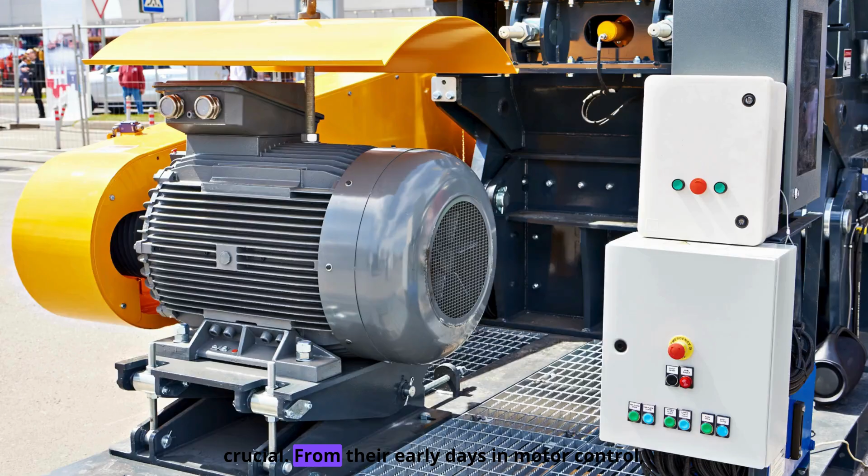Welcome back. Today, we're diving into the world of Allen-Bradley PLCs, a dominant force in industrial automation, brought to you by Rockwell Automation. Whether you're new to the field or need a refresher, understanding their controller families and software is crucial. From their early days in motor control, Allen-Bradley became pioneers in programmable logic controllers, even coining the term PLC.

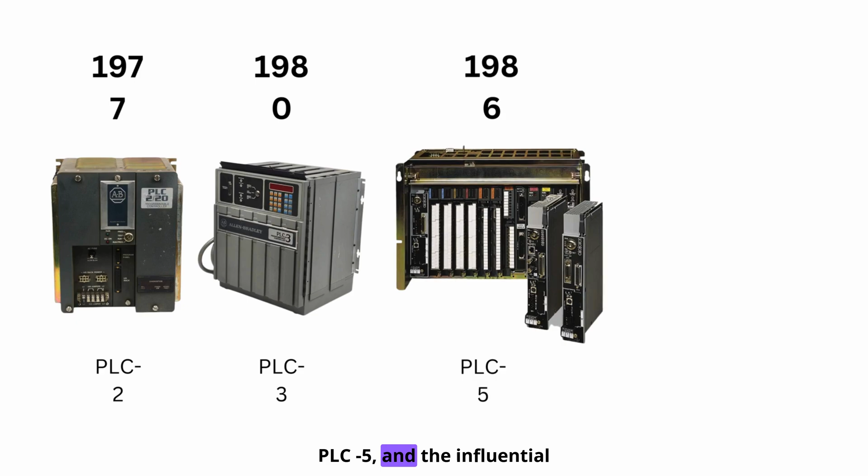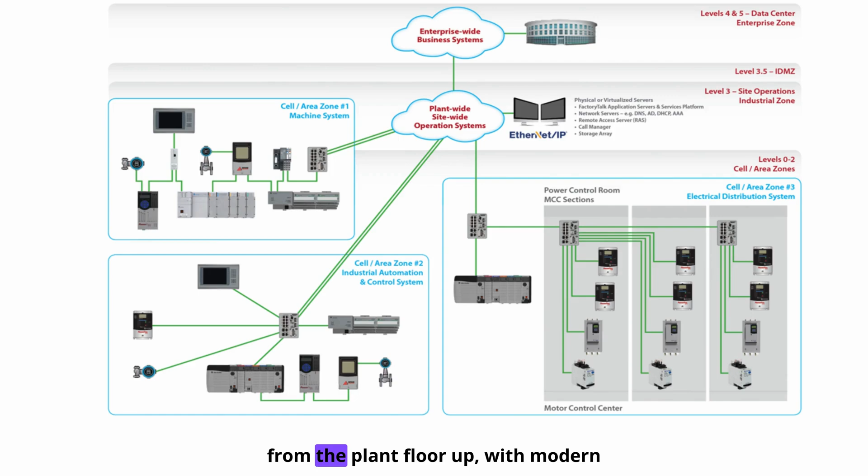They didn't invent the first one, but their early models like the PLC-2, PLC-5, and the influential SLC-500 cemented their legacy. Now, Rockwell Automation is a global leader, especially strong in North America. Their connected enterprise vision drives integration from the plant floor up, with modern controllers acting as key hubs.

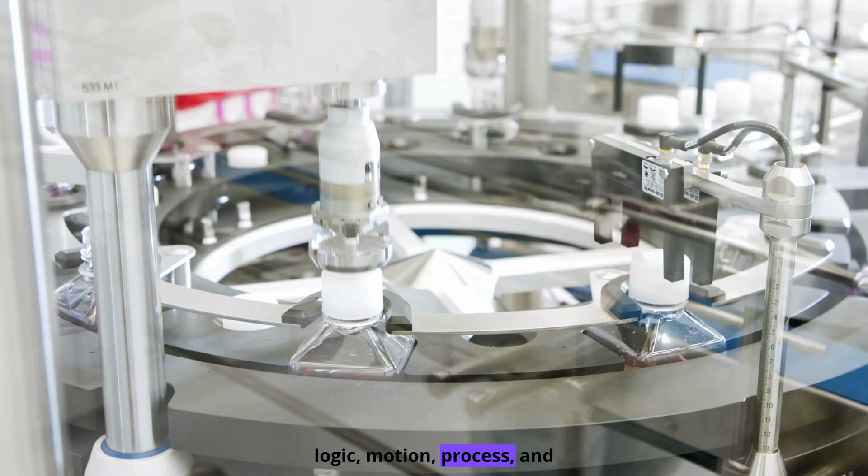You'll often hear PLC and PAC, Programmable Automation Controller. Modern Allen-Bradley units like ControlLogix are PACs, handling logic, motion, process, and safety in one platform. Rockwell offers controllers for every scale. Let's look at the main families relevant today, bridging legacy and modern systems.

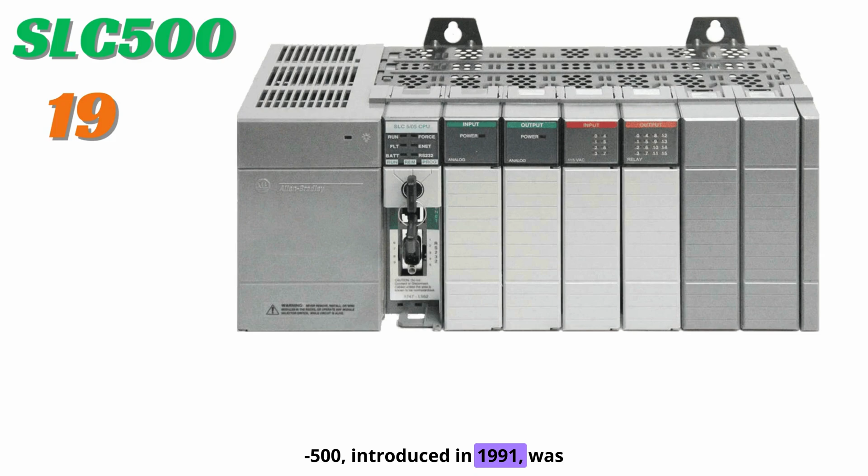First, the legacy systems, often programmed with RSLogix 500. The SLC 500, introduced in '91, was a modular, affordable step-up from older systems. It uses file-based addressing like N7:0 or B3:0/1. While aging, the Ethernet-equipped SLC 5/05 is still found in many plants.

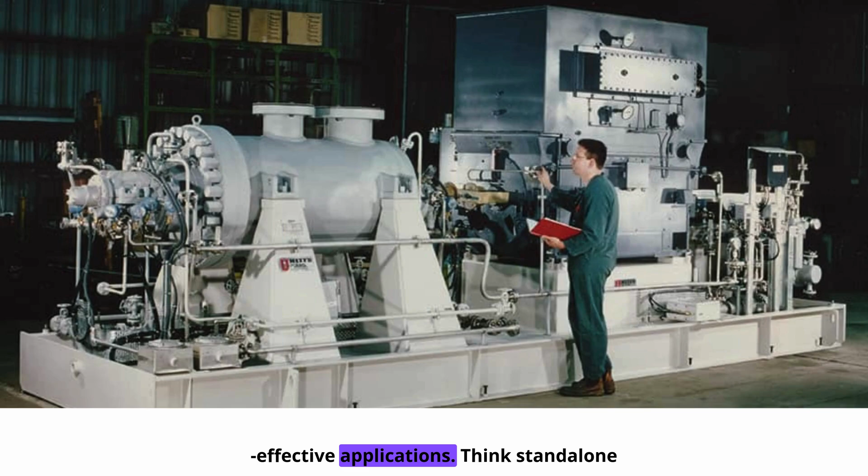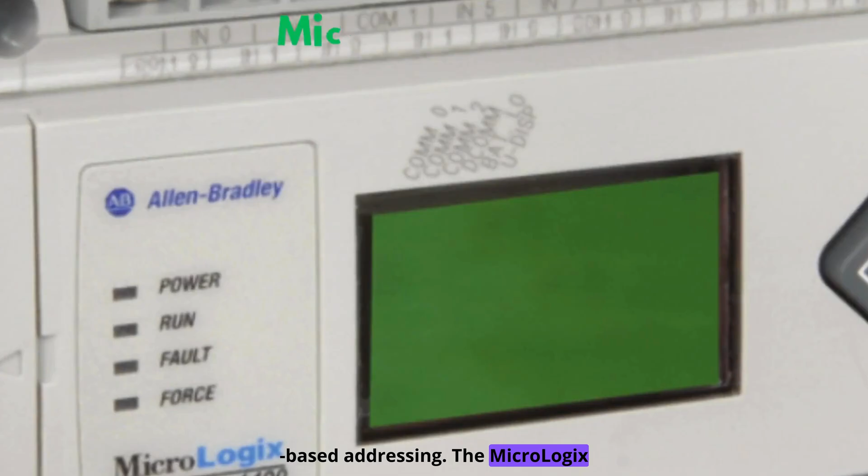The MicroLogix family, starting in '94, targeted smaller, cost-effective applications. Think standalone machines. These are typically brick-style controllers with built-in I/O, expandable to the side. They also use RSLogix 500 and file-based addressing. The MicroLogix 1400, with its built-in Ethernet, remains a popular workhorse. Remember, this is distinct from the newer Micro800 family using CCW software.

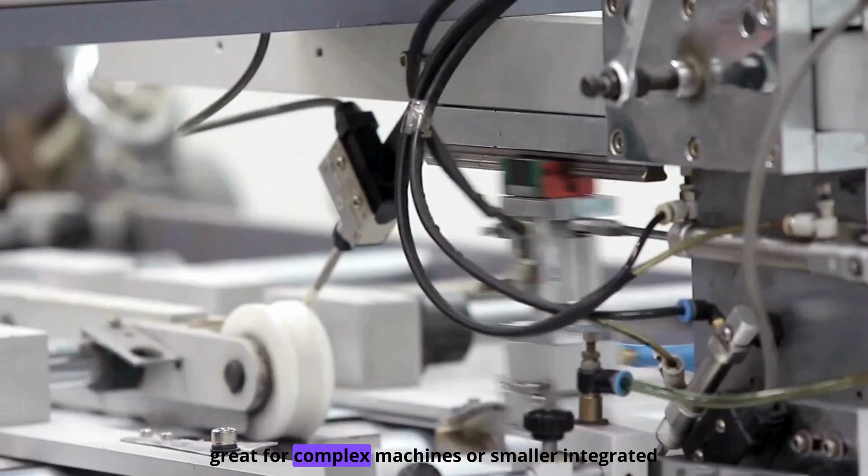Now, the modern Logix platform, programmed with Studio 5000 Logix Designer. These are PACs. The CompactLogix family bridges the gap. It's powerful, uses tag-based addressing, descriptive names like motor speed instead of cryptic addresses, and is great for complex machines or smaller integrated systems. Newer series like the 5380 offer high performance and integrated motion.

At the top sits the ControlLogix family. These are modular, chassis-based PACs for the largest, most demanding applications. Entire production lines, complex process control, high-speed motion. They offer the highest performance, scalability, redundancy options, and use Studio 5000 with tag-based addressing. Choosing between these families often comes down to hardware capabilities.

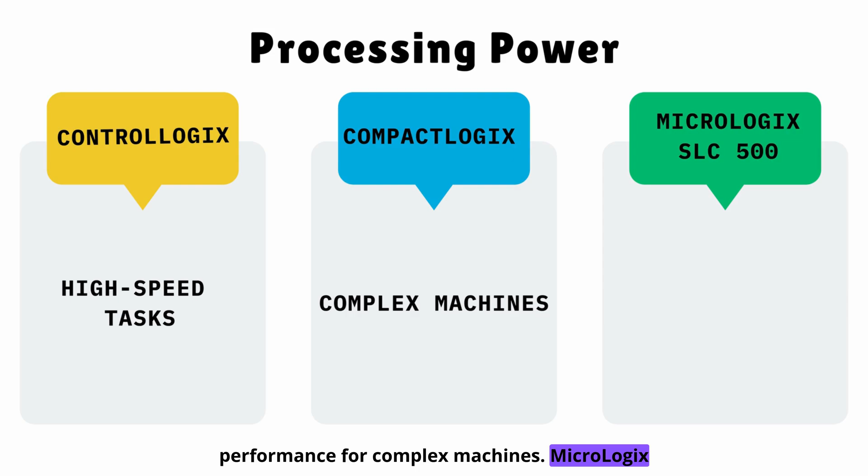Processing power. ControlLogix, especially the L8 series, is the fastest, ideal for high-speed tasks. CompactLogix 5380/5480 offers excellent performance for complex machines. MicroLogix and SLC 500 are suitable for simpler, less time-critical applications. Memory. ControlLogix has the most memory for large, complex programs. CompactLogix offers substantial memory for mid-range needs. MicroLogix and SLC have less, suited for smaller applications.

I/O and scalability. ControlLogix handles thousands of I/O points, both local and distributed, with features like online module changes. CompactLogix handles hundreds, good for machines or system areas. MicroLogix has limited local expansion. SLC 500 is moderate, supporting some remote I/O.

Size and cost. MicroLogix is the most compact and cost-effective. SLC is chassis-based, but older. CompactLogix offers modularity in a smaller footprint than ControlLogix, sitting in the mid-range cost. ControlLogix is the largest and most expensive, reflecting its premium capabilities.

Application scale. Match the controller to the job. MicroLogix for small standalone machines. SLC for legacy systems. CompactLogix for complex machines and mid-size systems. ControlLogix for large-scale, plant-wide, or critical high-performance applications. The software environment is just as important as the hardware.

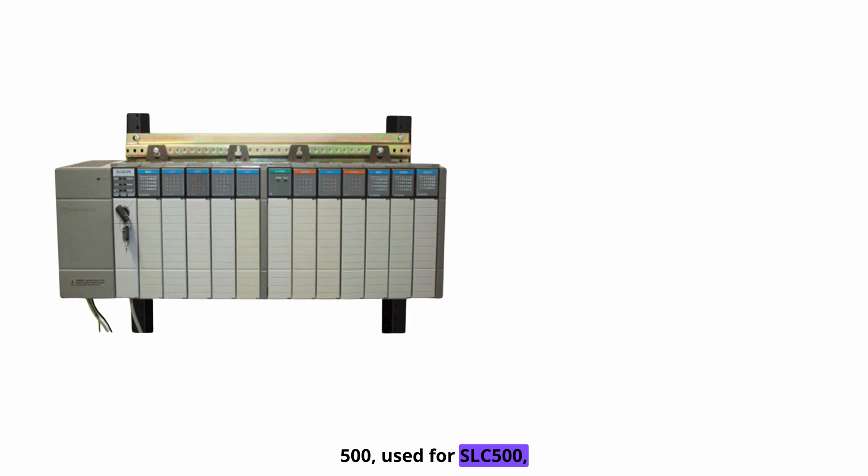There are two main suites. RSLogix 500, used for SLC 500 and MicroLogix. It features a simpler, older interface focused primarily on ladder logic. Its strength is file-based addressing, requiring you to manage memory locations like N7:0. Licensing is simpler and generally less expensive.

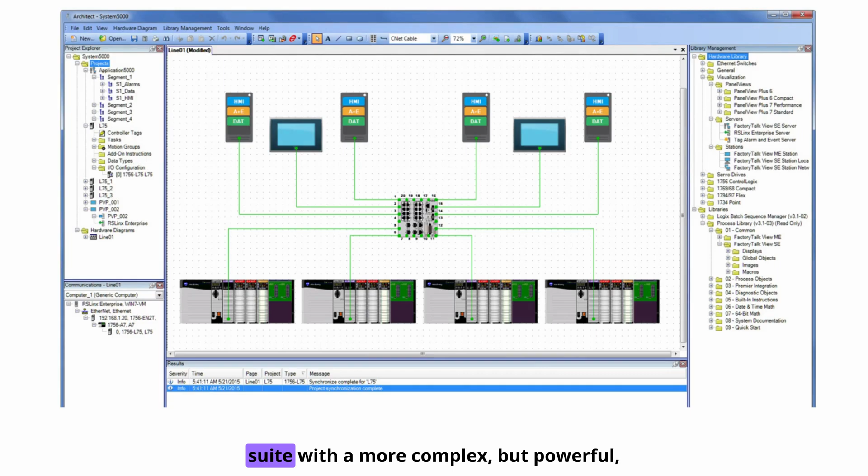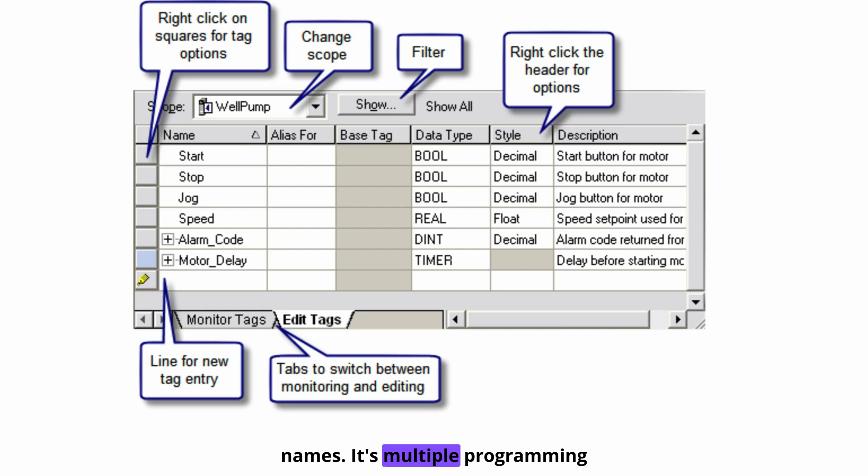Studio 5000 Logix Designer, the modern environment for CompactLogix and ControlLogix. It's an integrated suite with a more complex but powerful interface. Its biggest advantage is tag-based addressing, using meaningful names. It supports multiple programming languages: ladder diagram (LD), function block diagram (FBD), structured text (ST), and sequential function chart (SFC), letting you use the best language for the task.

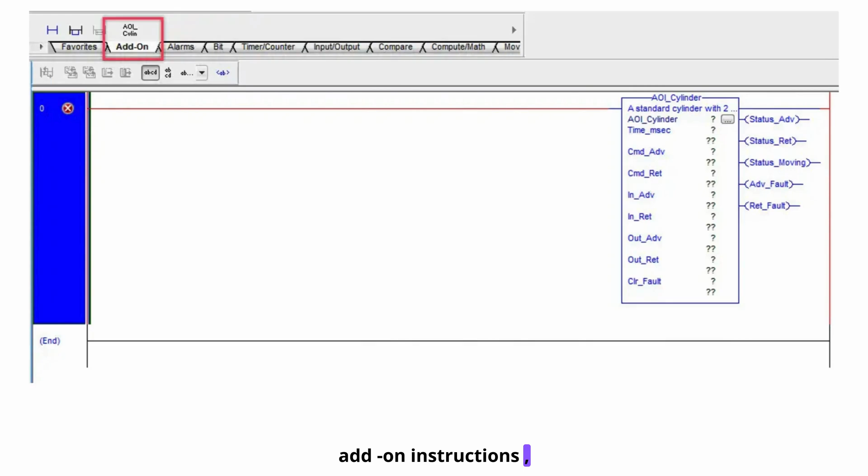Studio 5000 promotes code reuse through user-defined types (UDTs), custom data structures, and add-on instructions (AOIs), reusable code blocks. This speeds up development and standardizes code. A critical point with Studio 5000 is versioning. The software version must match the controller's firmware revision exactly. You might need multiple Studio 5000 versions installed. Licensing is tiered and more complex, with higher costs, especially for advanced features or controller support.

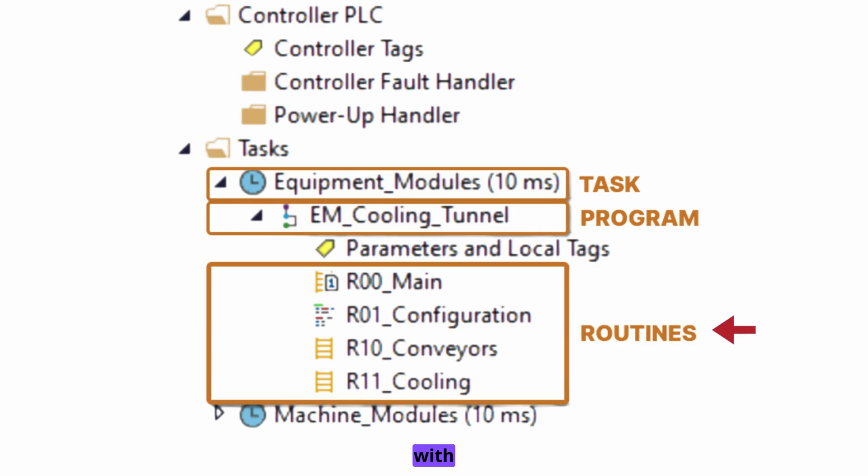Inside Studio 5000, projects are organized hierarchically. Tasks determine when code runs: continuously, periodically at fixed intervals, crucial for timing, or triggered by events. Programs organize logic within tasks. Routines contain the actual code, ladder, structured text, etc., with subroutines called as needed.

The tag database is central. You define tags with names, data types such as BOOL, DINT, REAL, and scope, controller-wide or program local. UDTs allow creating complex data structures, like grouping all data for a motor. AOIs let you encapsulate logic, like a standard motor starter block for easy reuse.

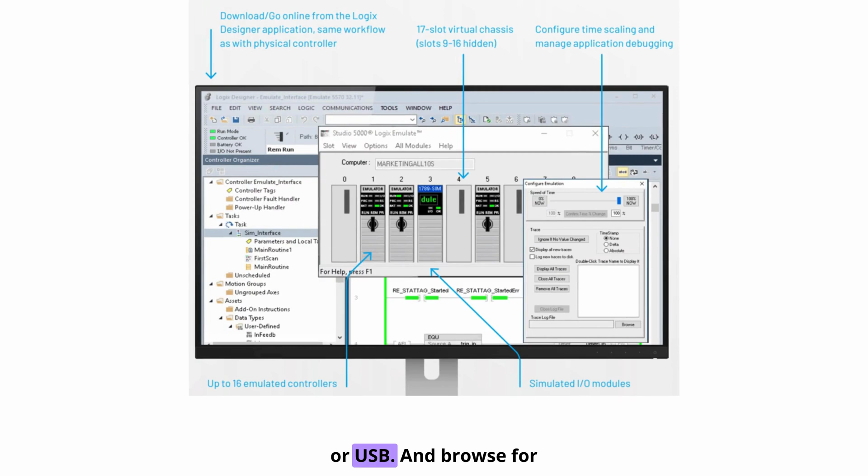Communication setup relies on RSLinx Classic, older, or FactoryTalk Linx, newer, to configure drivers like EtherNet/IP or USB, and browse for controllers to connect to for downloading, uploading, or going online to monitor logic in real time.

Firmware, the embedded software on the hardware, needs management. Updates provide bug fixes, security patches, and new features, but require careful planning due to the strict Studio 5000 version dependency. Use Rockwell's Product Compatibility and Download Center (PCDC) website to find firmware, check compatibility, and read release notes. The ControlFLASH Plus tool is used to download firmware to devices, often over EtherNet/IP or USB. It can update multiple devices and helps manage revisions.

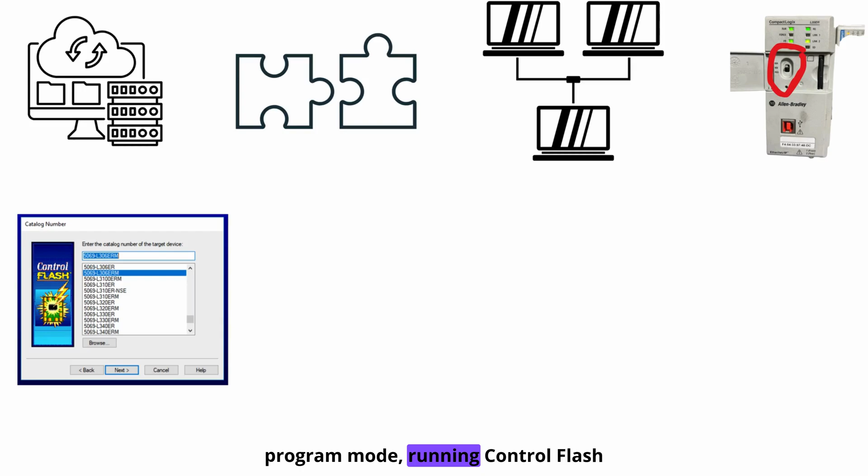The update process involves backing up your program, ensuring compatibility, establishing a stable connection, putting the PLC in program mode, running ControlFLASH Plus, and never interrupting power during the flash. Afterward, restore the program and test thoroughly.

Modern automation relies on networks. EtherNet/IP is the standard for Allen-Bradley's Logix platform. It uses standard Ethernet hardware, but applies the Common Industrial Protocol, CIP, for robust control data exchange. It supports high speeds and resilient topologies like Device Level Ring (DLR). CIP is the key. It's the common language used across EtherNet/IP, ControlNet, an older deterministic network, and DeviceNet, a sensor-actuator bus.

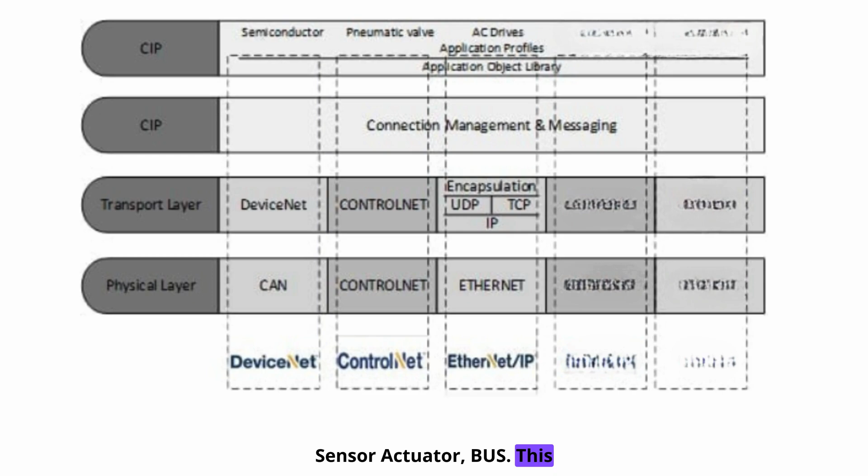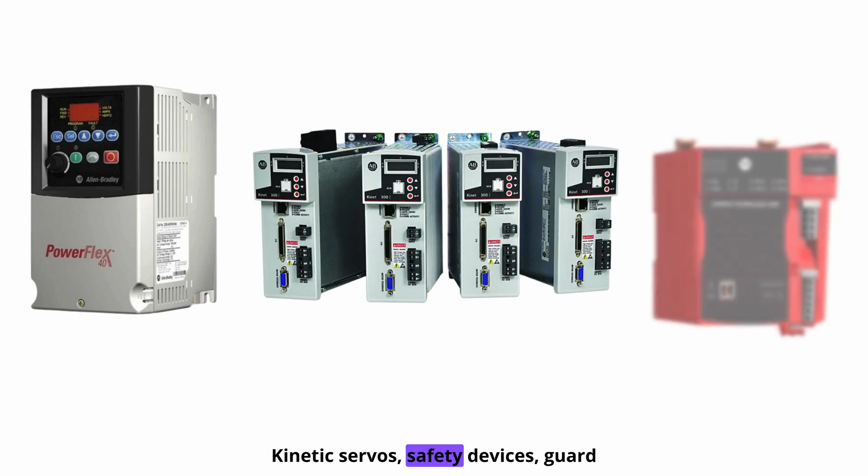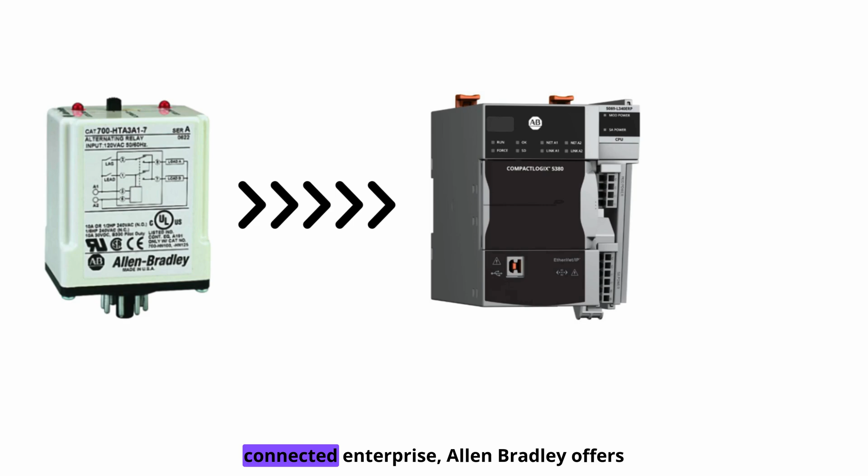This allows seamless integration. Logix controllers easily integrate with PanelView HMIs using FactoryTalk View or Studio 5000 View Designer, PowerFlex drives, Kinetix servos, safety devices, GuardLogix, Safety I/O, SCADA systems, and numerous third-party devices, often directly configured within the Studio 5000 project. From relay replacers to powerful PACs driving the connected enterprise, Allen-Bradley offers a wide range of solutions.